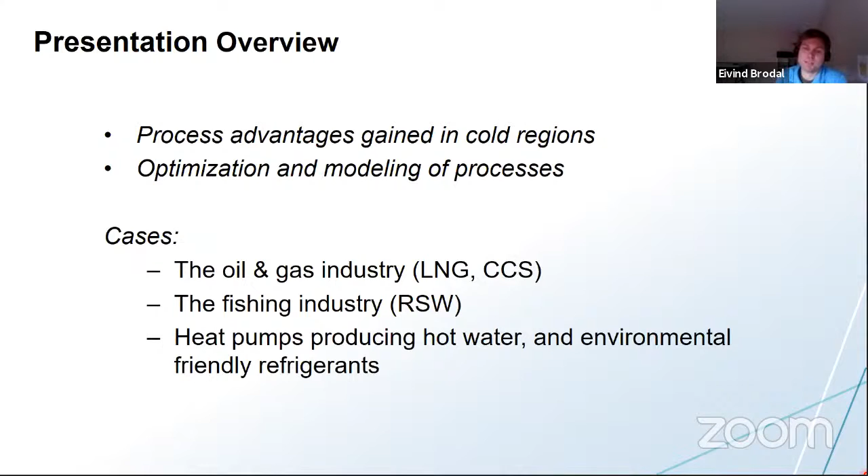Norway and Alaska has much in common: oil and gas industry, fishing industry, and cold climate. And these are the topics I want to focus on in today's talk.

And we have a branch at Svalbard, which is almost 80 degrees north. So that's super far north. And there's a lot of international students going to this place. But also University of Tromsø has a lot of international students, and we have different courses taught in English.

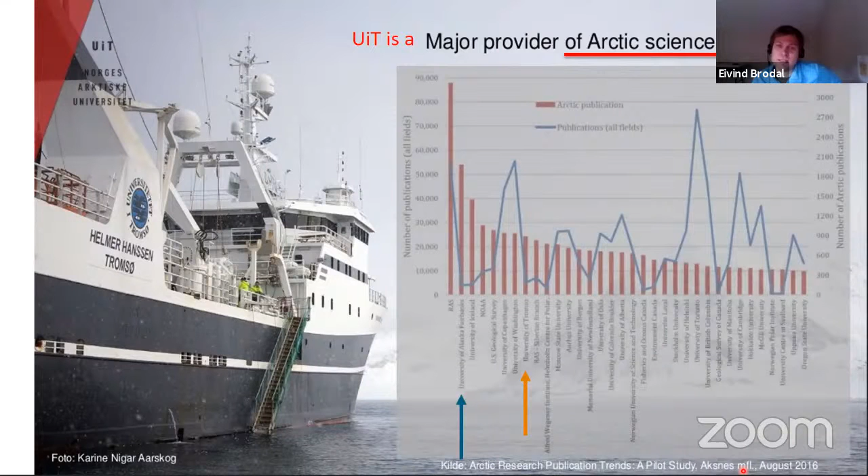UiT is a major provider of Arctic science worldwide, and you can see here Tromsø, University of Tromsø is among the 10 biggest institutions publishing articles about the Arctic. UAF is almost leading.

And what is the future for oil and gas in Norway now? That's a big debate in Norway. The future is in the north because all the oil and gas fields, much of it in the south is already explored. So the oil industry is moving north, and there's still significant opportunities in Norway for oil and gas.

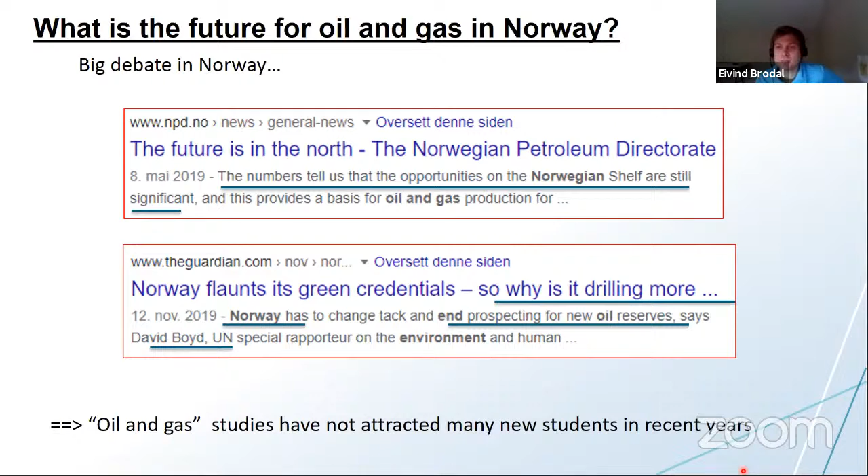Norwegians trust their elected politicians, even the ones they didn't vote for. And I think one of the main reasons for that is that politicians in Norway can't ignore science.

There's actually very few people in Norway complaining when we had to lock down because of coronavirus. People listen to the scientists, and the politicians listen to the scientists, and then people believe that the politicians are doing the best. So, some fun facts.

Much of the income from oil and gas has been saved in Norway. The Norwegian government has now saved $200,000 US per person. The Norwegian Oil Fund owns 1.4% of all the stocks in the world.

People in Norway are happy with that. I think even the rich and the poor agree on this. If you ask a person working at a gas station, do you want $200,000 US tomorrow on your bank account, they would most likely say no. They believe it's better to have the government dealing with this money.

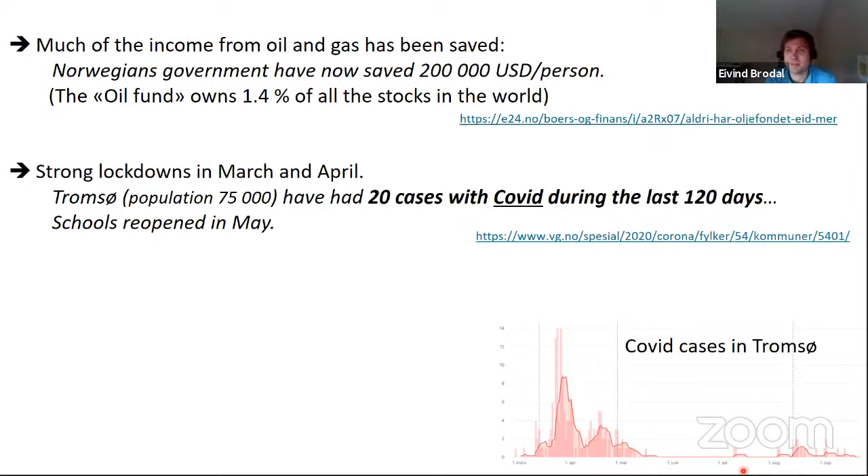I'm happy with what the government did in Norway, locking down hard, because it seems much easier to keep the numbers down when you have a few cases. If you have to find the contacts of 20 people and ask them to isolate for 10 days, it's much easier than if you have 3,000 people that have had COVID and you need to find their contacts.

The government is trying to fight global warming. For example, they're giving electric cars economic advantages. Actually, now more than 50% of new cars sold in Norway are electric. The government is also supporting CO2 capture and storage technologies, and they regulate the refrigeration industry.

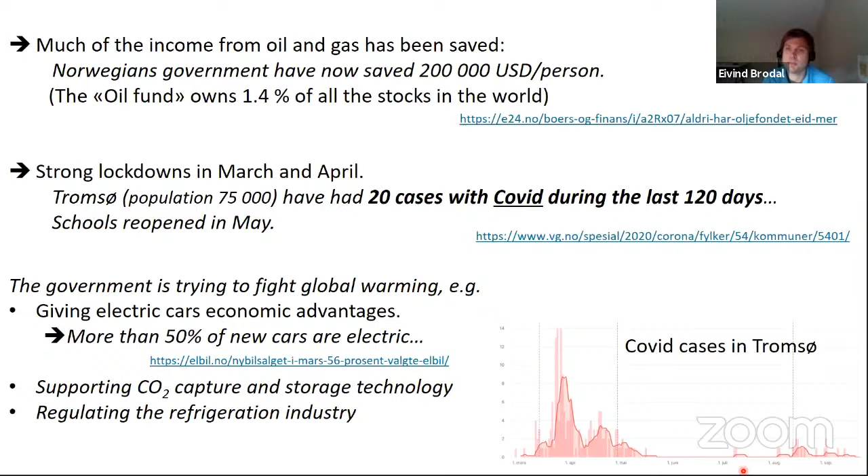Here's a table showing that in Norway, I think it's the only country, we have a deposit on HFC refrigerants, because they are a major contributor to global warming. If you buy R404A, a common refrigerant, maybe it costs $1 to produce, maybe a little bit more. But when you buy it, you have to pay $200 extra per kilo. So the deposit is huge, but that's because you had to regulate the industry this way.

The politicians asked scientists what should we do. The deposits are given back when the refrigerants are returned. This has caused much less leakage—it's much cheaper to call a person in to repair than having a leakage to the atmosphere. Also, environmentally friendly refrigerants have gained popularity.

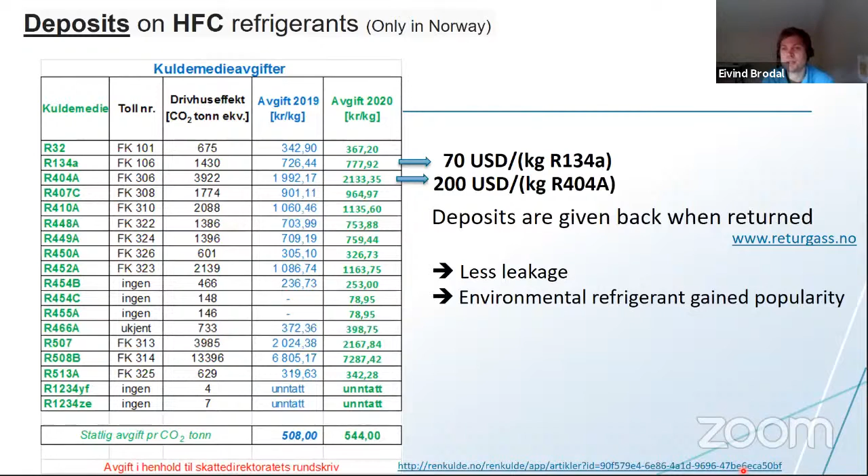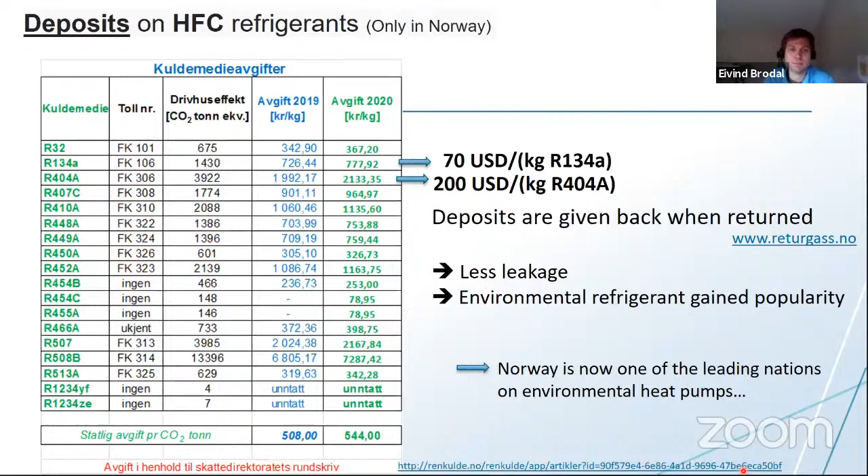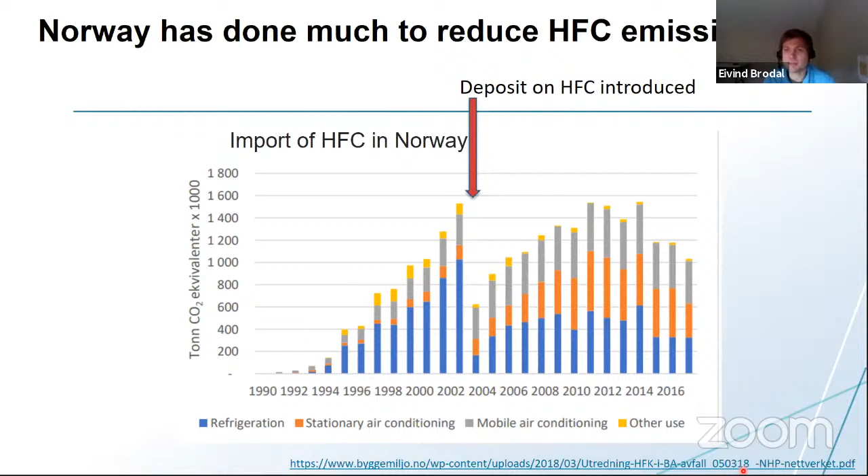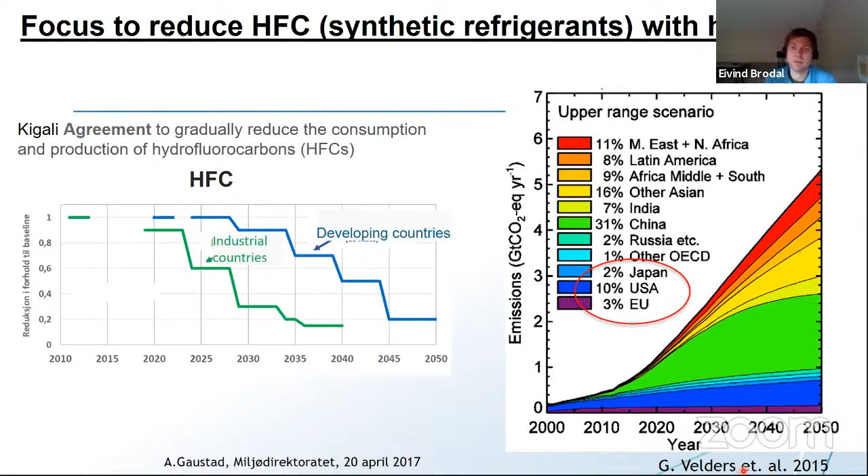I want to say something about refrigerants, the past and the future. The first refrigerants were natural refrigerants—chemicals already in nature, like CO2, ammonia, and propane. These refrigerants had their problems: CO2 had to work at high pressure and wasn't very efficient in warm climates for refrigeration.

Ammonia is poisonous and has other issues. Propane is explosive and can easily burn. So when chemists came up with synthetic molecules that didn't have these unwanted properties, they became popular, and people stopped using the natural refrigerants.

But later on, they found out that these new synthetic molecules had unexpected problems—they were bad for the ozone layer. In the 80s, the world managed to get rid of those, and it went kind of smoothly because the industry that produced synthetic refrigerants could switch to making other synthetic refrigerants, the HFCs, and the ozone layer was saved.

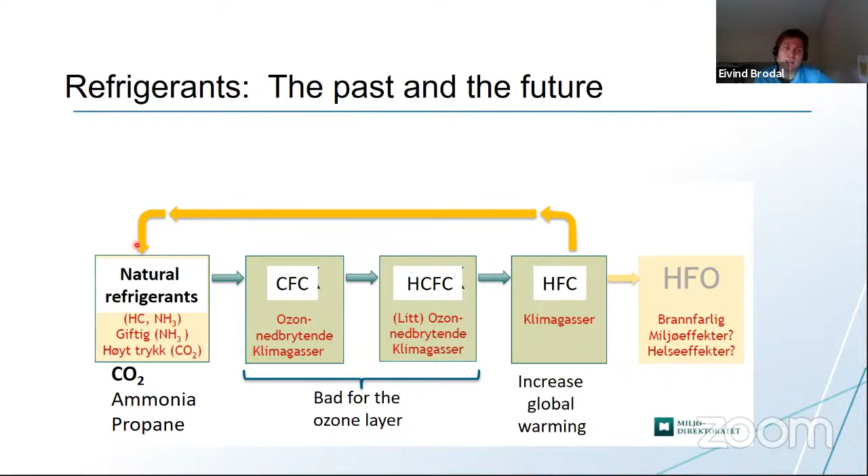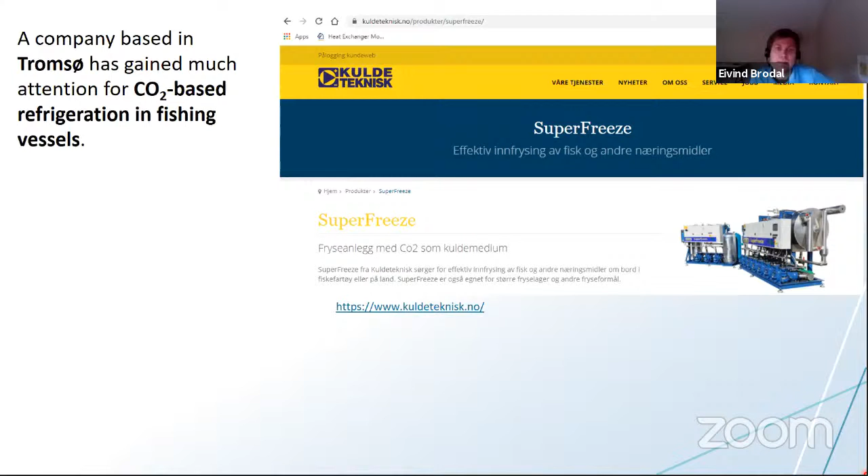In Tromsø, there's a company that gained much attention for CO2-based refrigeration in fishing vessels. Here you can see a picture of the SuperFreeze model.

The SuperFreeze model is a little different from other already existing models because it operates with much lower temperatures, and that can reduce the freezing time by 50%, lowering cost. Also, when you freeze products down very fast, you can argue that the product is better.

You can do that because you use CO2. CO2 can be very cold and still be above atmospheric pressure, and it's not a hazard. You could cool down the fish directly with CO2, so you don't have to have an indirect refrigeration system, which would reduce the COP.

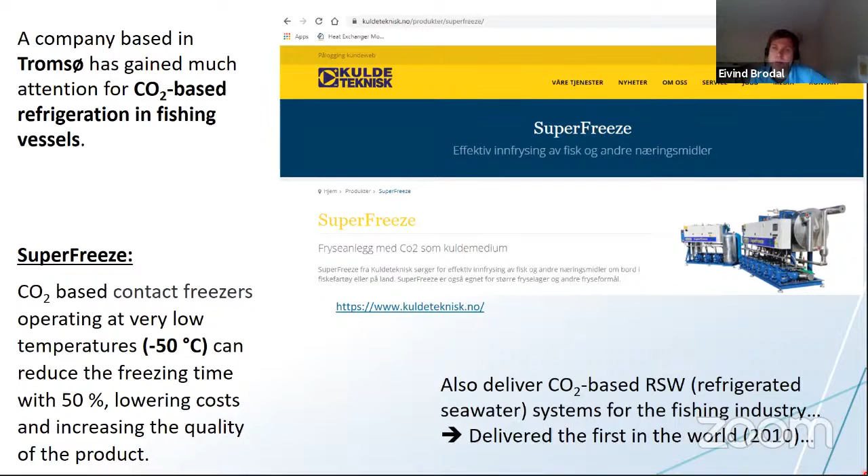This company also delivers RSW, where you cool down seawater together with the fish. It was the first to deliver CO2-based RSW units on a boat in the world, and that was done in 2010. So this is kind of a new technology.

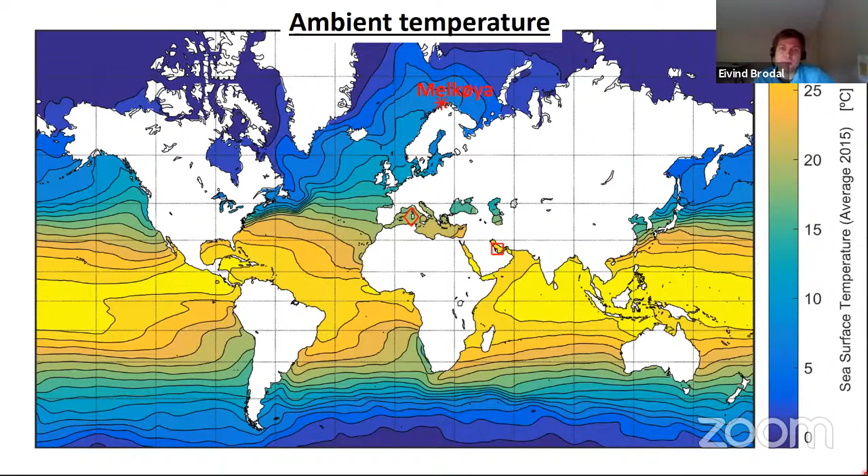Going into the research questions and findings, we studied a lot about the ambient temperature. This map shows the sea surface temperature around the world. Melkøya is shown here, that's close to Tromsø and has LNG industry. You see that the temperature in Tromsø, around 6 degrees, is similar to the temperature in Anchorage.

Cold regions are often related to additional costs because of icing, remoteness, and small populations, so you have to fly in people to operate there. But can cold climate also be an advantage, reducing cost and CO2 emissions?

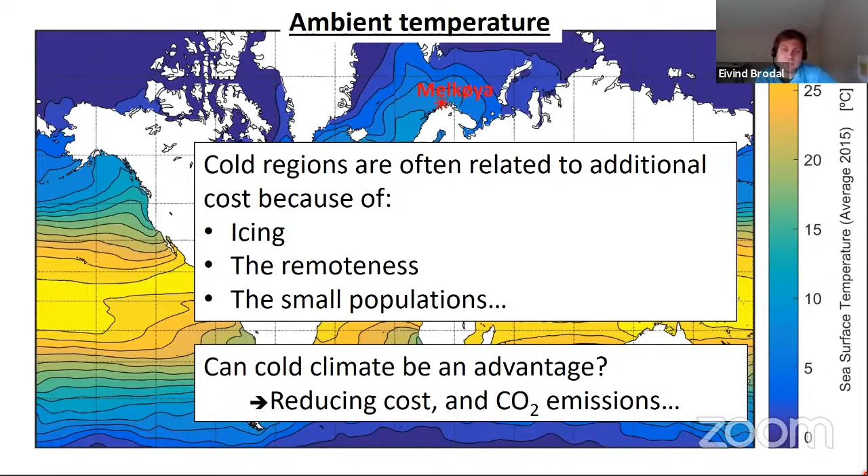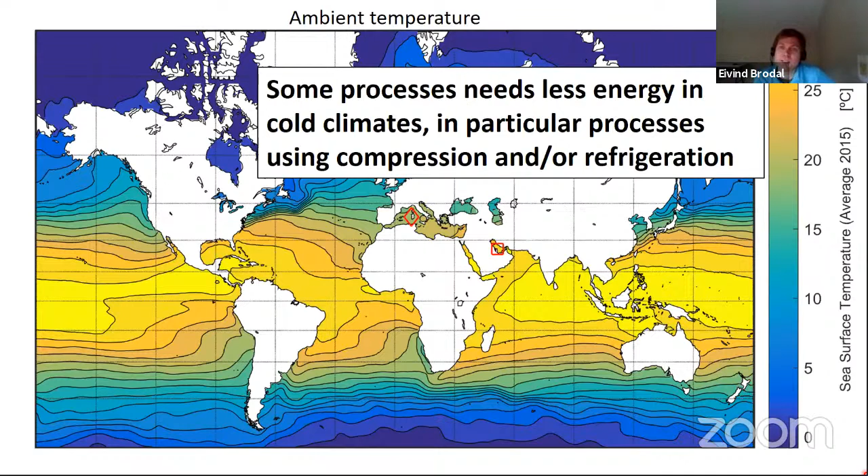That's a question I've been very interested in, because some processes need less energy in cold climates, particularly processes using compression or refrigeration. For example, LNG, liquefied natural gas, the product is natural gas at minus 162 degrees and atmospheric pressure. It's kind of obvious that if you start from 5 degrees, when you cool down, you save more energy than if you had to start from a warm location, for example 25 degrees.

But there are also other more hidden benefits, indirectly, because the refrigeration process is more efficient. There are compressors in the compression cycles, and if you're able to cool down the temperature before it enters the compressors using ambient temperature, then you save energy.

Production of liquefied hydrogen is similar to LNG. You cool something down to really low temperatures, so you probably save a similar percentage with cooling down hydrogen.

CCS, carbon capture and storage - a main thing that costs energy is the compression to a high pressure. You need to compress the CO2 before transportation, and that includes a lot of compressors. So if you can cool down the temperature before each stage, you save a lot of energy.

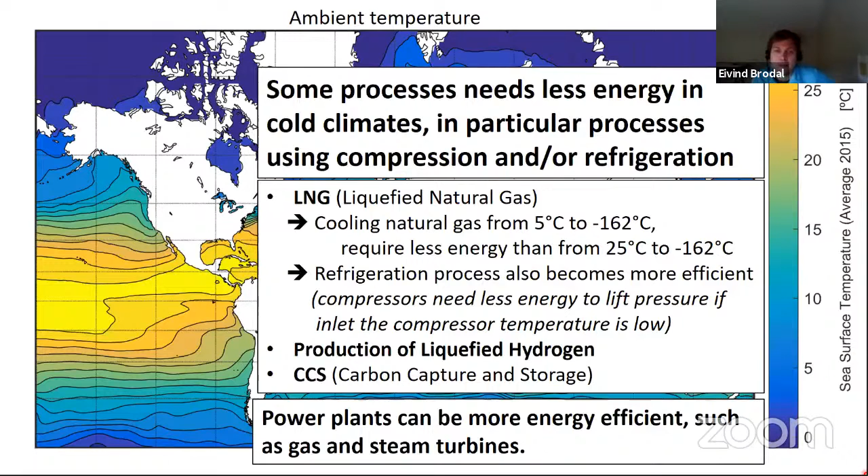Also, power plants can be more energy efficient, such as gas and steam turbines. You probably remember the Carnot cycle, operating between two different temperatures, a max and a minimum. The minimum temperature is related to the ambient temperature, so if you lower the ambient temperature, the efficiency increases.

So what are optimal processes in cold regions? How can systems be made more friendly for the environment?

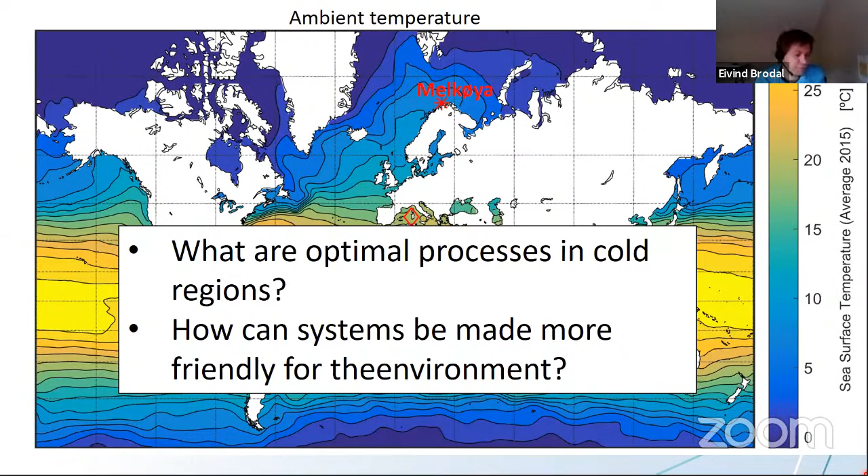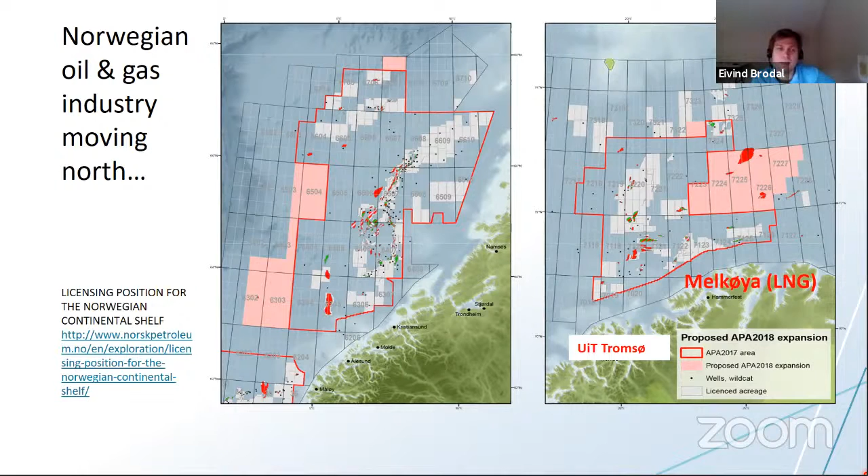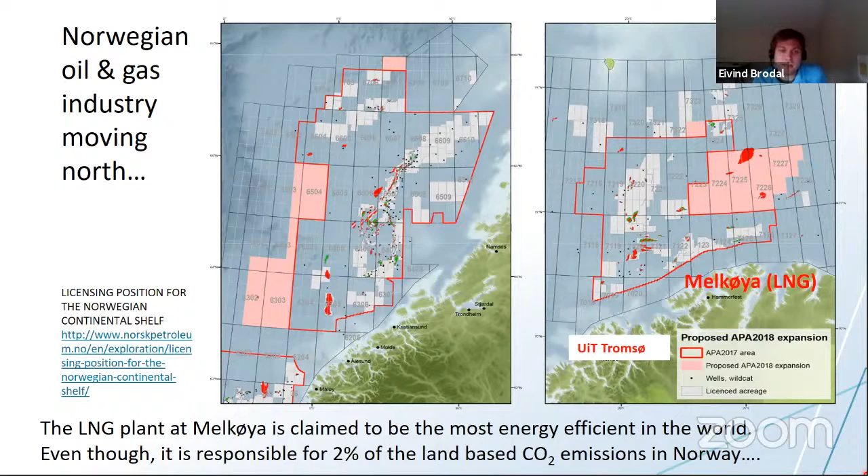The LNG plant at Melkøya is claimed to be the most energy efficient in the world. One of the reasons for that is maybe its location very far north. But still, it's responsible for 2% of the land-based CO2 emissions in Norway. So it would be nice to reduce emissions from LNG plants.

Since LNG plants always burn natural gas to produce the electric power needed in refrigeration, the percentage saved in energy is directly translated to the CO2 emissions saved or reduced. So that means you can reduce the CO2 emission by building LNG plants in the north.

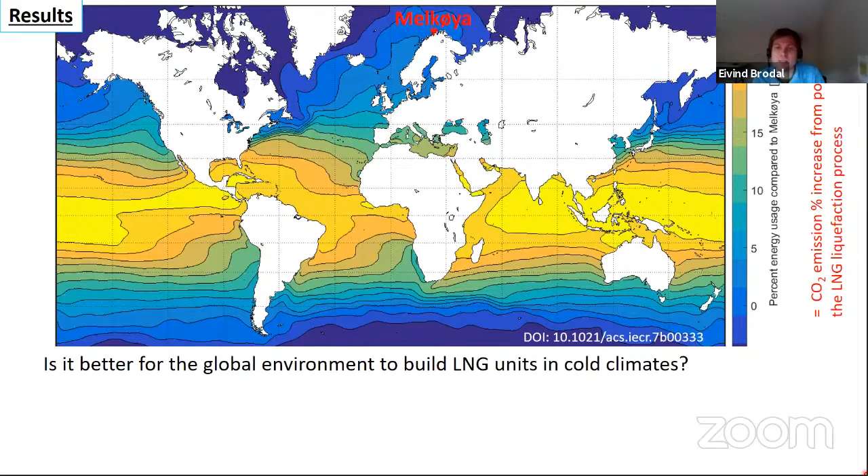So is it better for the global environment to build LNG units in cold climates? If Melkøya plant was built in the Middle East, the world total CO2 emission would increase by about 0.5% of the Norwegian land-based CO2 emissions. However, building LNG plants in the north doesn't solve the global warming problem, because the LNG is burned later on, releasing about the same amount of CO2 as the whole of Norway.

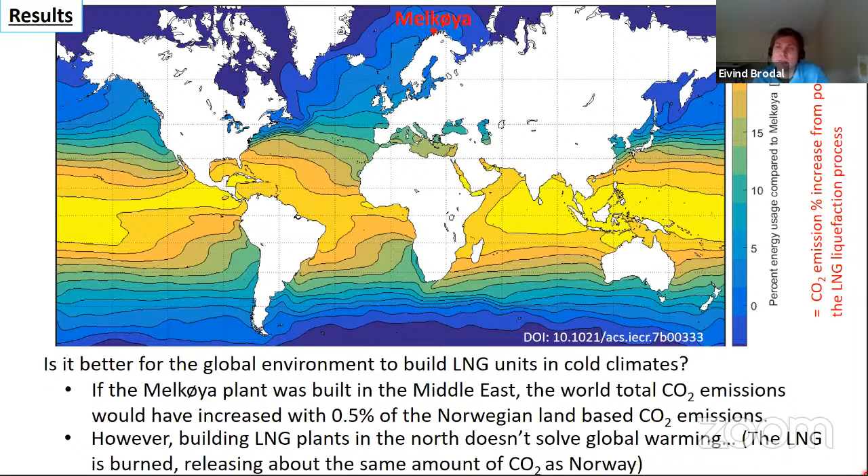So carbon capture and storage could be a solution to this problem. You have the oil and gas, you send it to the power plants, you catch the CO2, and then you transport it down into the ground where it is stored.

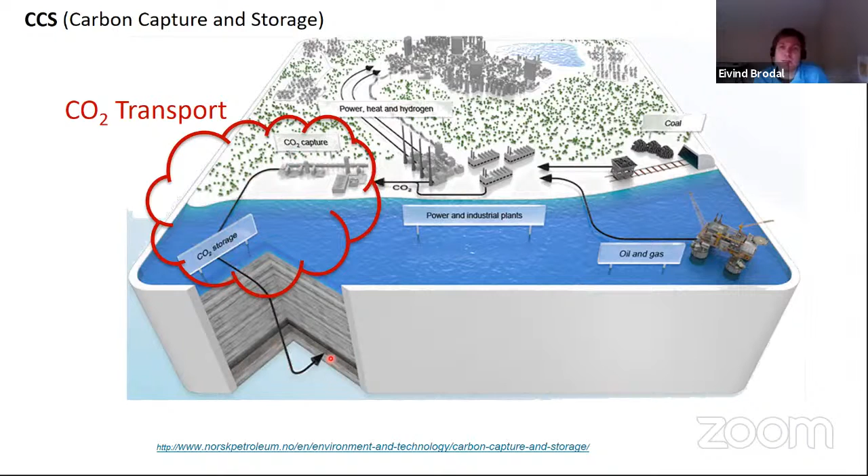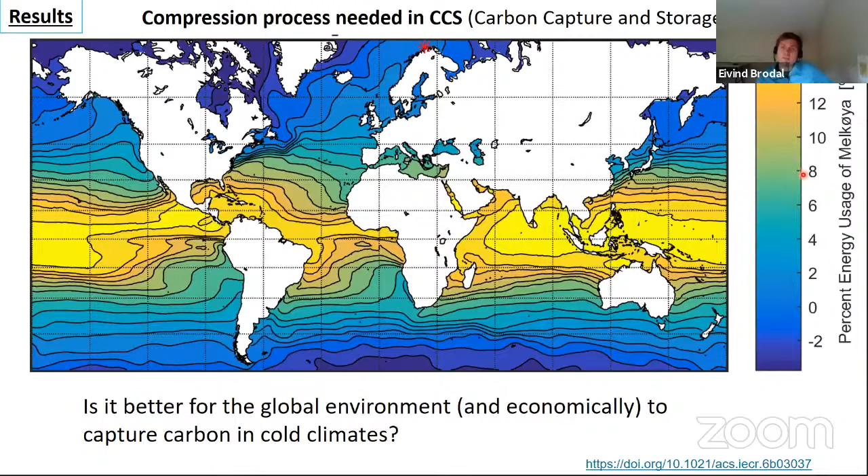So is it better for the global environment and economically to do carbon capture in cold climates? That's the question, and we studied this in this article. The carbon capture can be done in different processes.

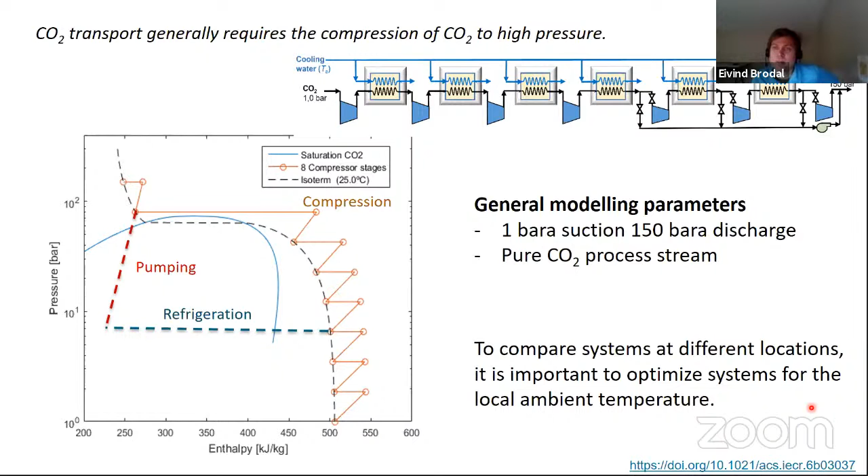So this compares systems at different locations. It's very important to optimize the system for that ambient temperature. In this study, we saw that you need a different number of compression stages at different ambient temperatures, because you have to compare the optimal under the same basis.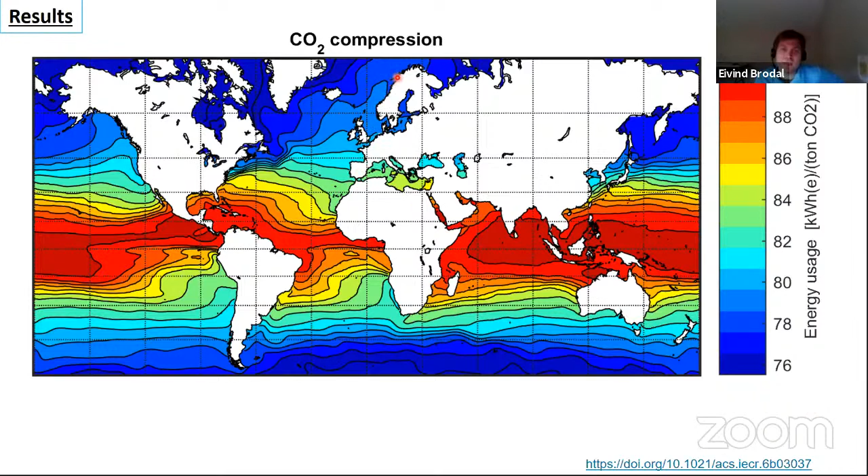And when this was done, our results show that the energy use at different places is given in this map. So you can save a lot, and that's what I showed in the figure I showed earlier already - percent-wise there's an interesting gain.

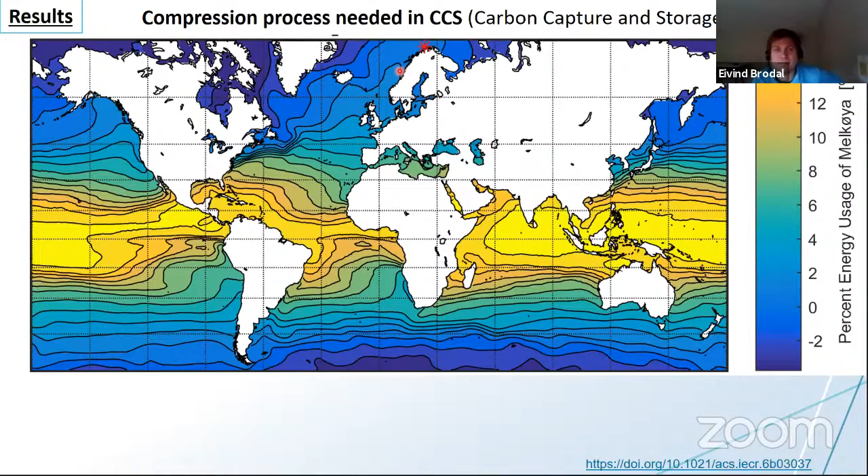So an interesting thing we looked at is how the hydrocarbons can be exploited with a neutral CO2 footprint using CCS schemes, and what is the best way of doing this. I have a PhD student in Norway who looks into this - which scheme is best, how should you do the carbon capture.

One way is to produce LNG locally and export it, like we're doing today in Melkøya, to consumers who burn it. The consumers today probably don't capture the CO2, but in the future they could. So that's one alternative. Another one is to burn the natural gas locally.

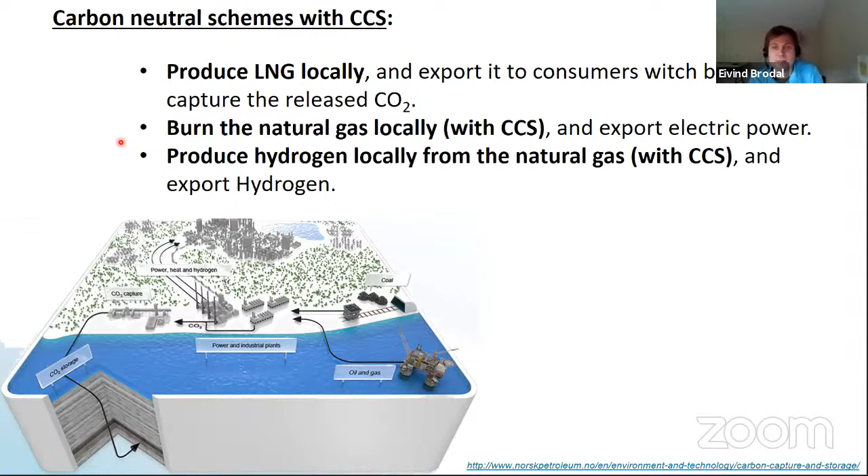Another alternative is that you make hydrogen locally from the natural gas. You capture the CO2 released in that process, and you export hydrogen. So which of these three cases, all carbon neutral processes, which one is best? That's what my PhD student is looking into.

CO2-based units for fishing industry. I've been working with that. This is an article talking about RSW units, refrigerated seawater tanks, where you put the fish.

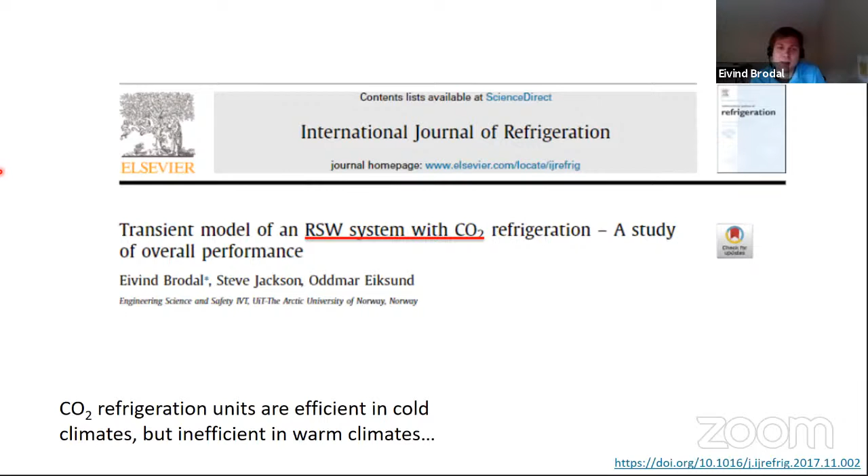CO2 refrigeration units are efficient in cold climates, but inefficient in warm climates. The reason for this is that CO2's critical point is around 30 degrees, so around that temperature the CO2 becomes inefficient.

The reason is that when ambient temperature increases, the compression power increases relative to the refrigeration duty, and you get a lower COP, coefficient of performance, which tells how efficient the refrigeration is. If the temperature increases even more, you have to go transcritical, and the COP is even worse. This is what was modeled in this article.

You have the compressors, a gas cooler if it's operating transcritical, and a condenser if it's subcritical. Then you have a receiver, expansion valve, and evaporator, and then a big RSW tank which is cooled down.

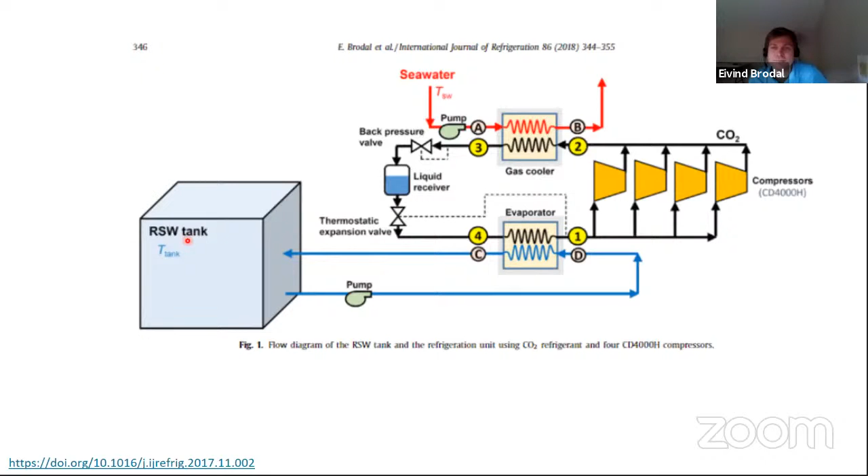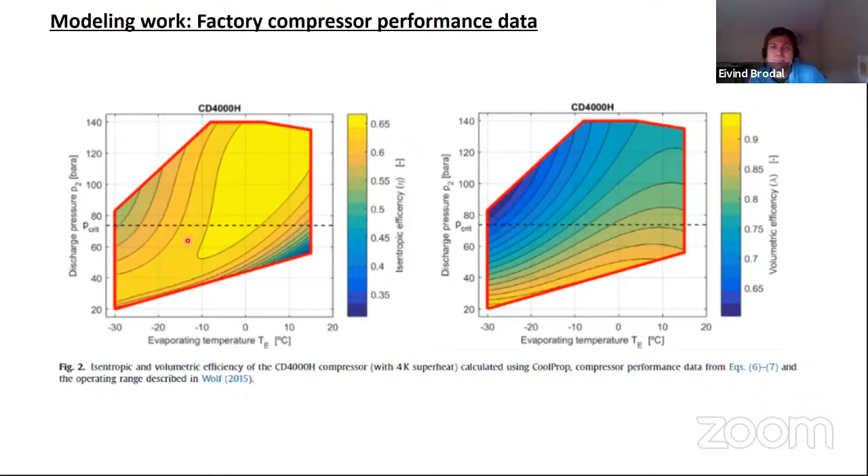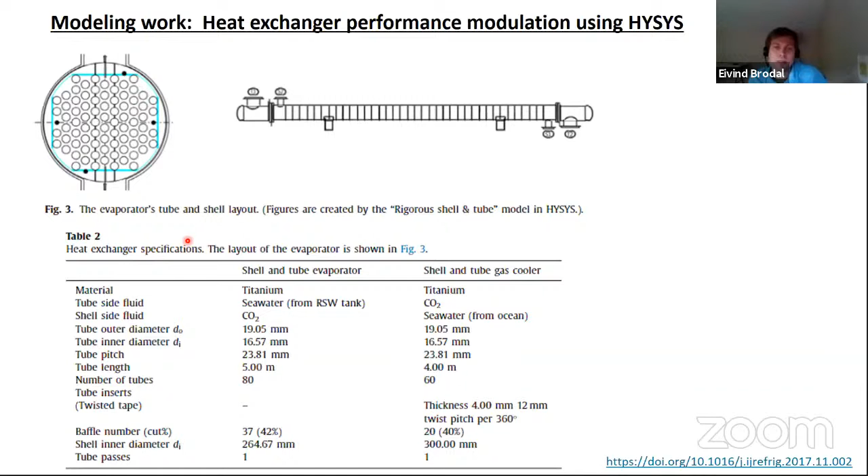When modeling this, we used factory compressor performance data, showing the isentropic efficiency of the compressor and the volumetric efficiency at different discharge pressures and evaporating temperatures. We also included a heat exchanger model from HYSYS, which was run each time in modeling, more specific with the dimensions and stuff.

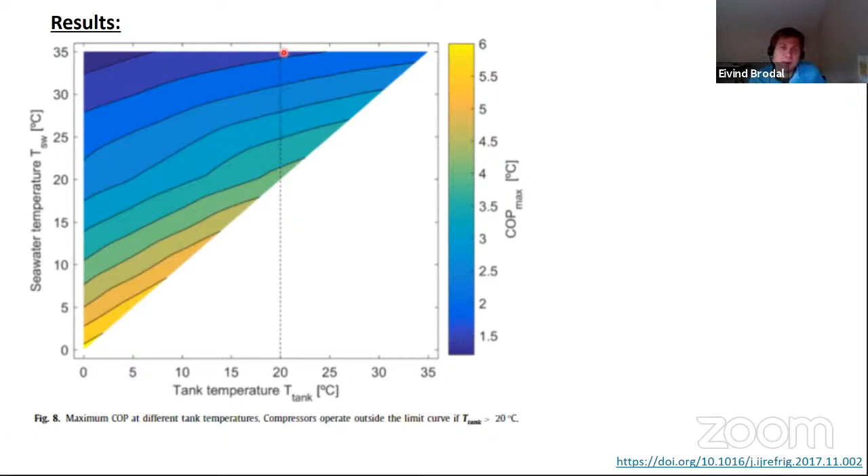This COP data was put together with temperature data around the world, and shows that in the north, around Tromsø, the COP is around 5, which is similar to Anchorage — very good for a refrigeration unit.

Before the company in Tromsø started making CO2-based RSW units, ammonia was the most popular one in Norway. It might still be the most popular one. It maybe gets a better COP than CO2, but it has other issues. So CO2 has gained a lot of popularity.

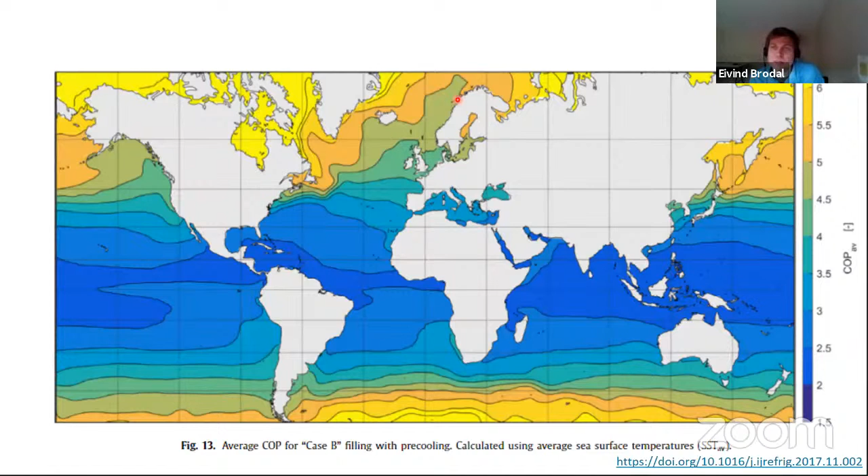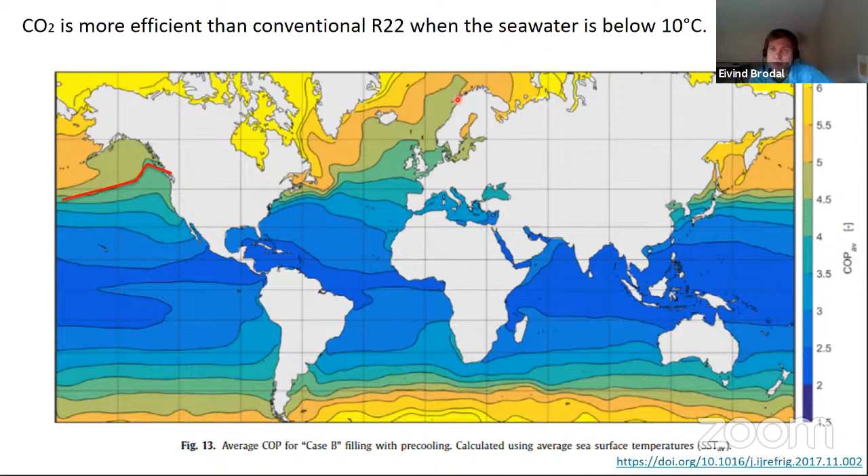CO2 is more efficient than the conventional R22 in cold climates, around 10 degrees. In Anchorage, CO2 is maybe more energy efficient, and also if you have a leakage, it has a low GWP compared with other refrigerants.

Here are some scenarios we modeled. There are different regulations you have to follow, like the fish has to be cooled down to 3 degrees within 6 hours, and to 0 degrees after 16 hours. We modeled different seawater temperatures and how the tank was filled, starting before you started fishing and cooling down parts of the tank, then looked at COP over time.

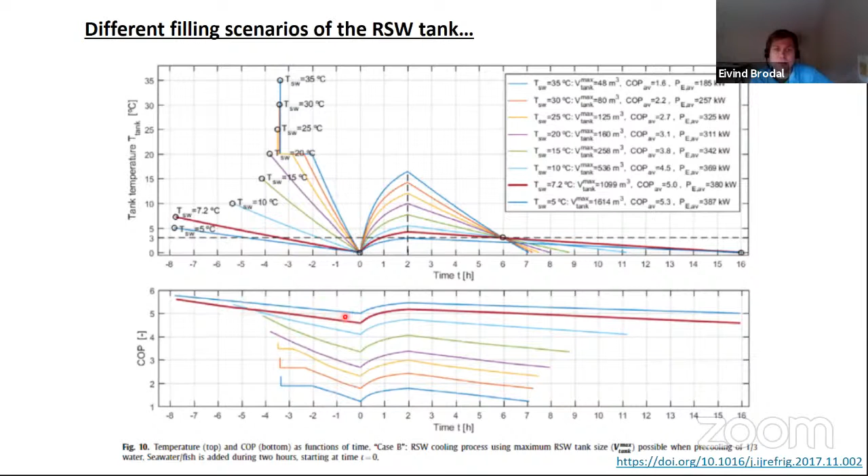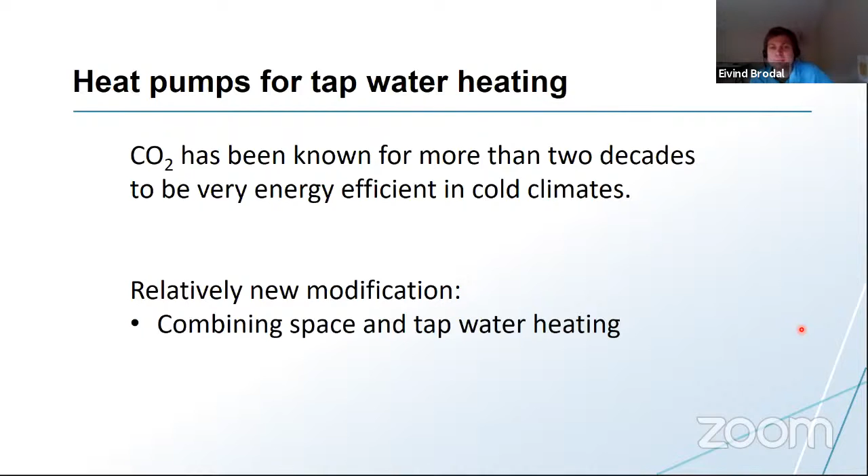We also looked at heat pumps for tap water heating. CO2 has been known for more than two decades to be very energy efficient in cold climates for tap water heating. But we looked at a relatively new modification combining space and tap water heating. This is shown here: we have a compressor, so this is CO2 going into the system, an internal heat exchanger, and then evaporator.

This modification introduces space heating. Space heating, if you have floor heating in a building, typically doesn't have to be that warm, maybe 35 degrees, because the floor area is huge. So you have a large heat exchanger into the room, maybe 35 degrees Celsius water heating. But the tap water you have to warm up higher, maybe to 70 degrees. This system we actually have in a lab at UIT.

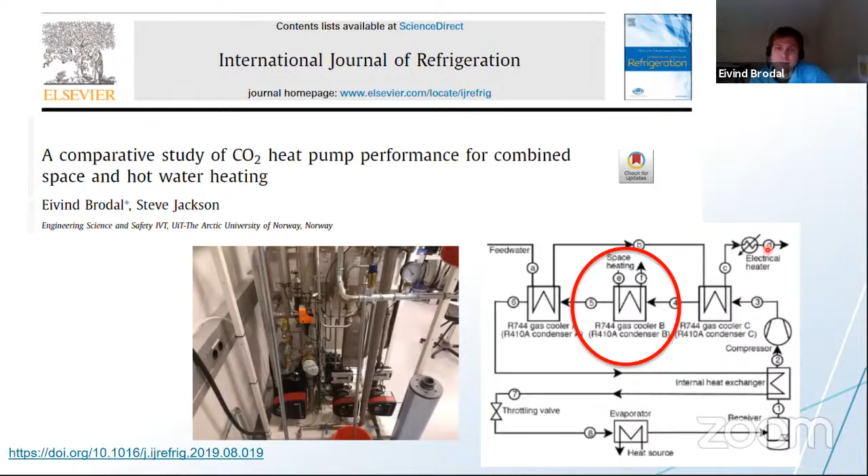This modification with space heating increases COP, or can do it, because it reduces the heat exchanger loss. What you see here is the CO2 being cooled down in the 3 different exchangers shown here.

In the first exchanger, CO2 warms water to 70 degrees. You can't cross this — it's impossible to have a temperature crossing here, because heat always goes from the warm fluid to the cold. Then you have the second heat exchanger, space heating, warming water from 30 degrees to 35.

You see there's a very good match here, and that's why you increase COP. Then you have the last heat exchanger, warming the water from ambient temperature up to 25 in this case. So you get less thermodynamic loss in the heat exchanger because you have a very good match between the temperature profile of the refrigerant and the heating demand.

This is a heat temperature diagram. The area between the graphs shows how much entropy you generate. If you have a good match, you create little entropy, and then you have an energy efficient process.

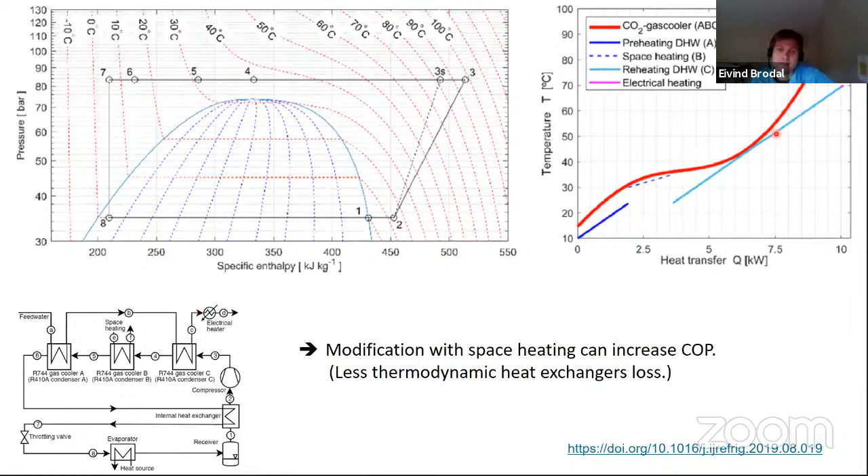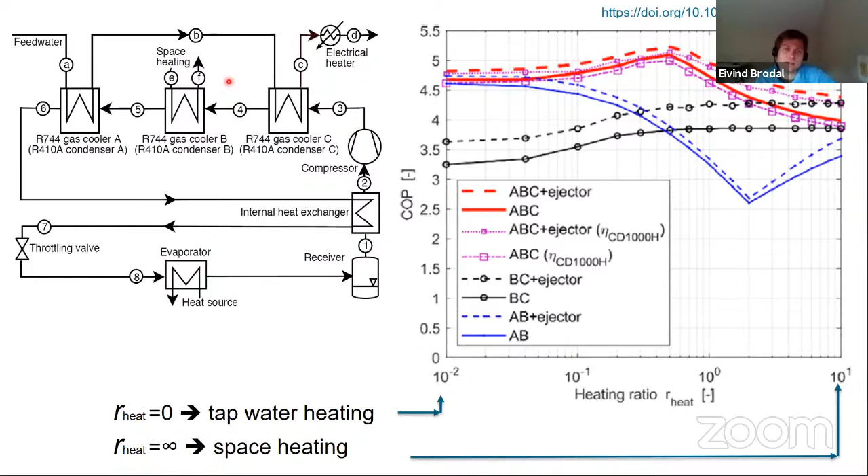So on this side you have tap water heating, pure tap water heating, and this is CO2. Then you have different cases with the ejector and without the ejector, and also some other cases where you just have two heat exchangers. But in all cases, introducing this gas cooler for space heating increases COP. We also see that it has a much higher COP for pure tap water heating than pure space heating. You also see that maybe you have a 10% gain if you had this, so you gain 10% energy efficiency if you can use some heat to warm the space in the house.

We also compare the system with a conventional system with R410A. What we saw is that for tap water heating, CO2 was much better than R410A if the temperature was cold. At 30 degrees, R410A was better. So in cold climate, CO2 was better than the conventional system. But for space heating on the side, you see that R410A is always better.

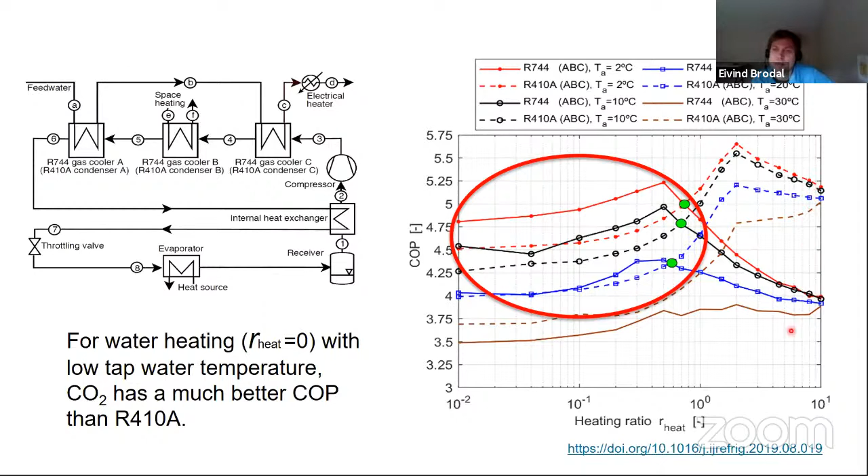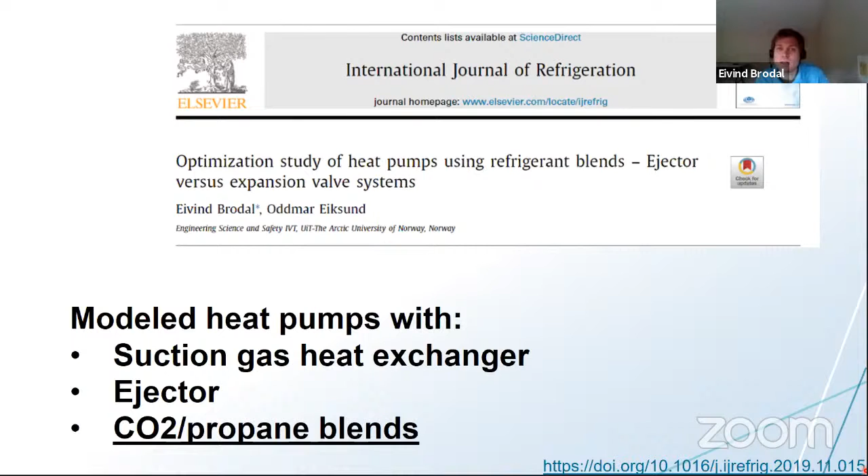So we also studied blends. If you mix CO2 with propane, that's what we investigated - what kind of gains do you have. So we modeled heat pumps with a suction gas heat exchanger, ejector, and CO2-propane blend mixes. We looked at these different systems.

This is pure propane for this system with an internal heat exchanger. So you have three different heat exchangers: the gas cooler, the suction gas heat exchanger, and then the evaporator. So this is a condenser, this is the internal heat exchanger, and this is the evaporator. For propane, you see there's not a good match between propane and the tap water heating demand - it's tap water heating up to 70 degrees. So this is not very efficient.

If you look at CO2, the difference is much less - the average is 12 instead of 19 degrees. So CO2 therefore has a better COP than propane. But if you add 10% propane to CO2, then you get an even better match between the heat exchangers. You can also see in the evaporator, you also reduce the temperature difference in the exchangers. So then it's possible to have a more energy efficient system.

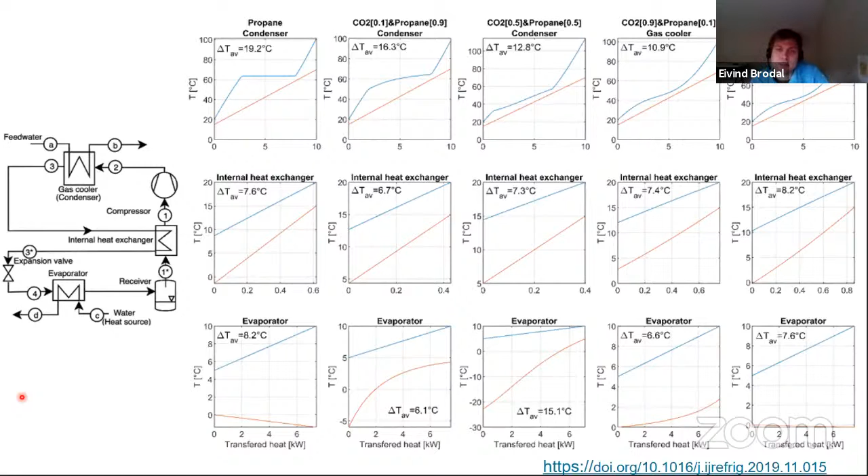Here the COP is calculated for different mass fractions - this is pure CO2 and this is pure propane. You see for the CO2 system, having an ejector in the system increases the COP significantly. But you can almost get the same gain if you don't use an ejector but instead use a blend - you blend in some propane, like 20% propane.

This is a different case with a higher ambient temperature. And then you see that CO2 is not the best alternative. With the ejector it's a little bit better than pure propane. But the best system is these systems where you have mostly propane, but some CO2 blended in.

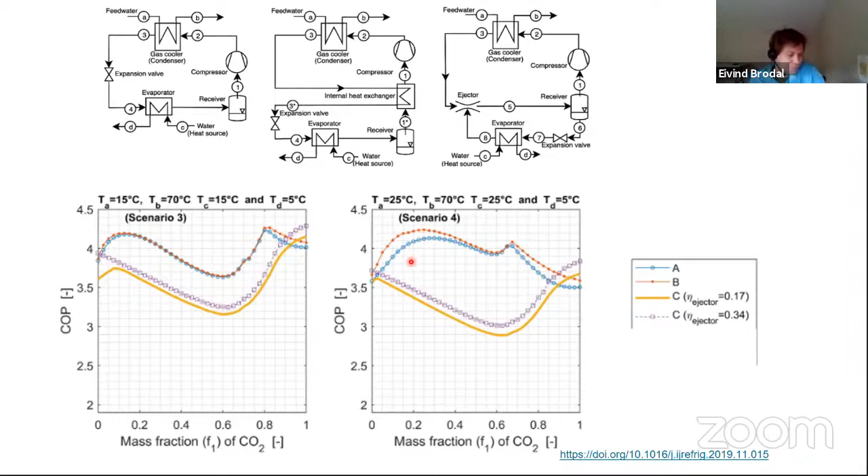And then I mentioned the LNG process, the model we had related to the article I showed earlier - the model, optimization, and results. So this is the article, discussing the mixed fluid cascade process, which is the process we have at Melkøya. It's kind of a complicated process - it uses three different refrigerant blends, and each blend has three different components.

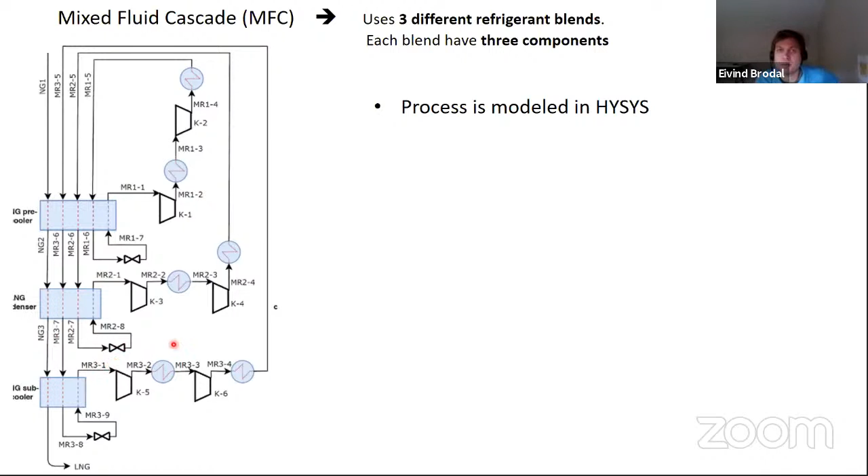So some natural gas is entering here and being cooled down to maybe minus 40, maybe minus 100, and minus 162 - you do it in stages. This is the first refrigerant blend cycle, and it has much propane in this cycle and heavier hydrocarbons, and it gets lighter as the temperature needs to cool down further. The process is modeled in HYSYS. Compressors are modeled using isentropic efficiencies, and heat exchangers are modeled with minimum temperature pinches and different constraints - there's a lot of different constraints: minimum pressure, compressor pressure ratio, minimum superheating, and so on.

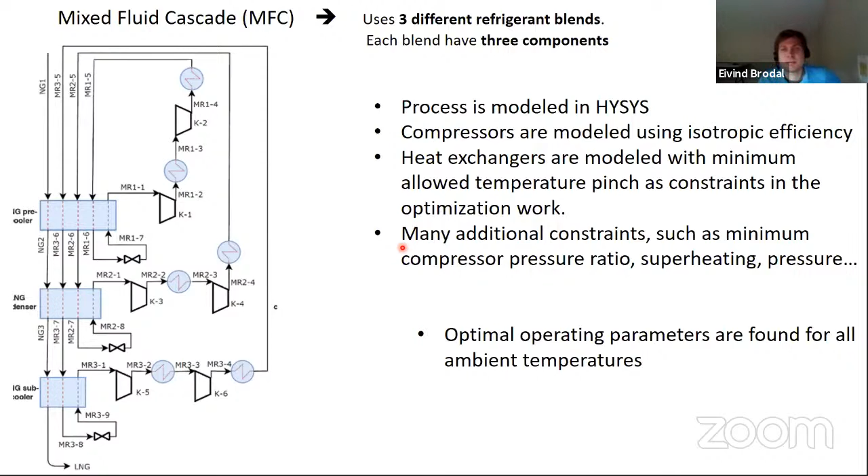Optimal operating parameters are found for all ambient temperatures. It's important to optimize the system for each temperature, because what is good in a warm climate is not good in a cold climate.

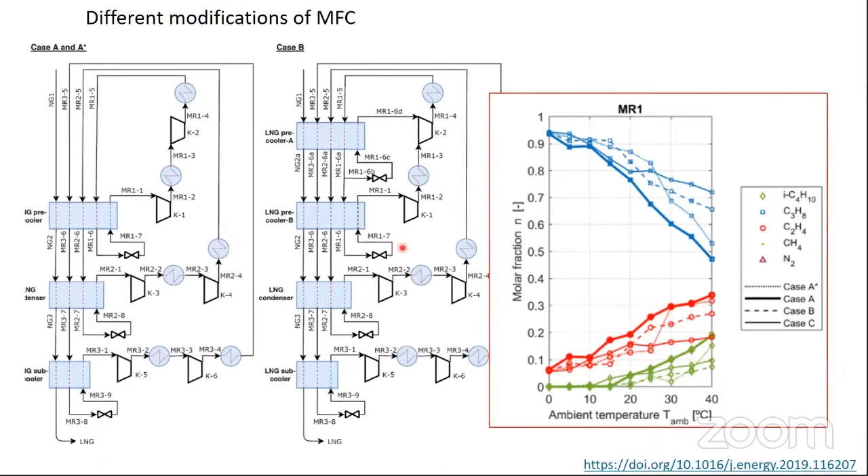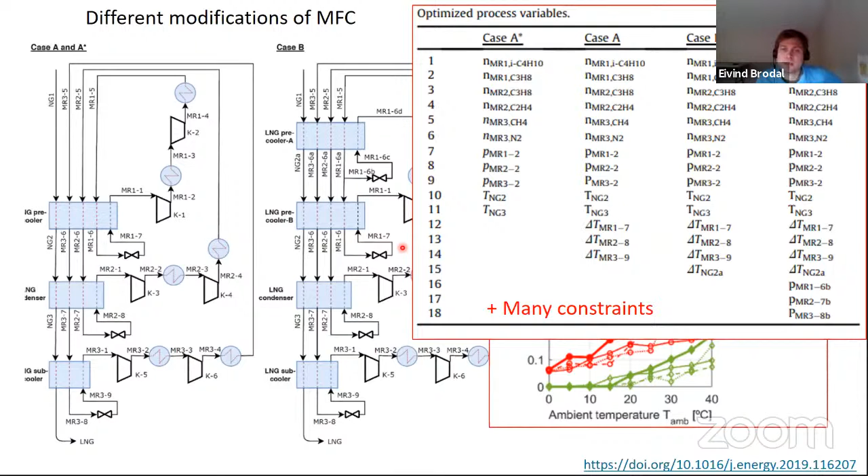Here you see the different optimal refrigerant compositions of the first mixed refrigerant, and the different processes studied. There were different optimization variables, going all the way up to 18 different things optimized at each temperature, plus all the constraints. So it was a difficult problem to solve for the computer.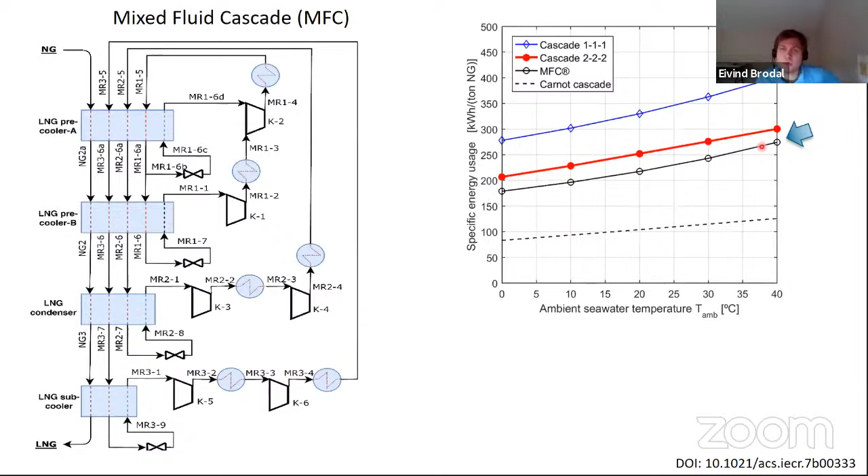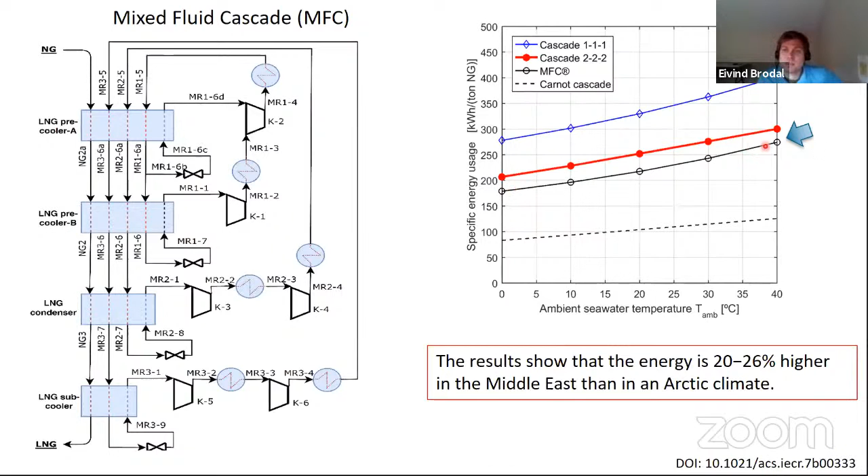The results show that the MFC process and the different processes gain about the same amount of energy by operating in cold climates. The results show 20 to 26% higher energy use in the Middle East than in Arctic climate.

We use this combined with seawater temperature around the world to get the map I showed earlier. You see that the temperature in Anchorage is the same as Melkøya, so it's 0. You gain, or use, 20% less energy in Alaska than in the Gulf. So it's interesting to see what can be gained in the Arctic climates, also with respect to global warming.

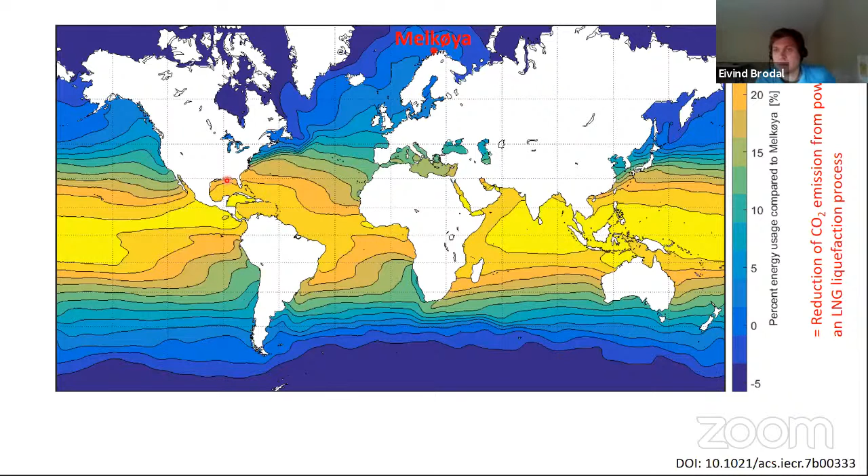That was what I had to present today. All right, thank you very much.

That was awesome, very, very interesting. I think most of our... oh, okay. So moving on to the Q&A, we already have some questions coming up here for you. The first one is, what software is used for modeling?

For the LNG articles I use HYSYS, developed by the oil industry. For the heat pumps, I work in MATLAB, and then I use CoolProp or Trend. For mixtures, Trend is good, but CoolProp is also good to find the properties of refrigerants.

Awesome. And the sea surface temperature data I got from the Japan Meteorological Agency. They have good data on the temperature around the world.

Awesome. All right, so I've got a general interest question for you. What temperature do you usually keep your houses at there? Because in Anchorage, 68 to 72 degrees Fahrenheit, close to 20 to 22 degrees Celsius, is common. So what temperatures do you usually have indoors?